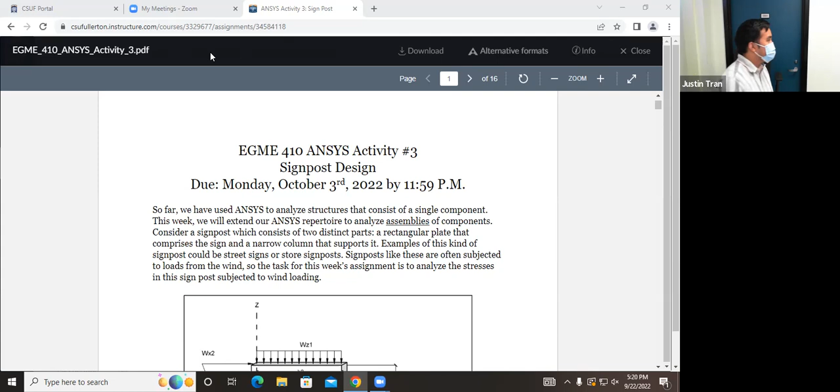All right, so we have an ANSYS activity today. And so if you want to start up Workbench, I'm going to do that right now. Then we can kind of hit the ground running once it begins.

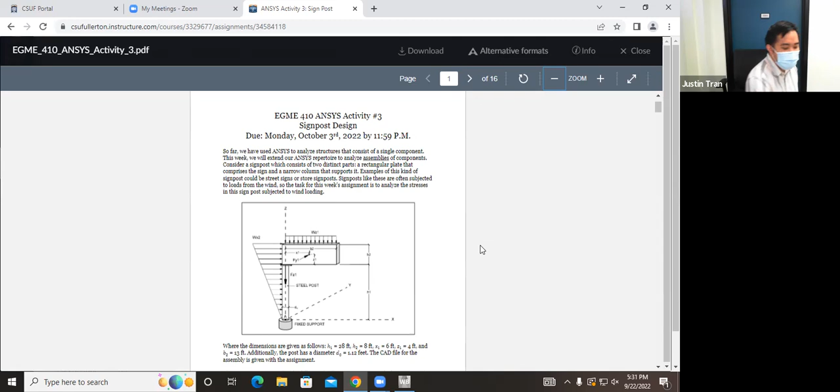And so I think last time we were here for ANSYS, I told you that I would look into seeing if we can update the versions for ANSYS here in the lab to 2022. So literally the day after I said that, we got an email from the dean's office saying that our IT person no longer works here. And so literally the day after I said I would talk to IT, the person that could do it no longer works here.

And so that person just started too? Yes. Wow. So I don't know what happened, but he's not here anymore.

Let's just assume for the foreseeable future that this is how it is. So you're going to have 2021 here in the lab, and on your laptops at home it's going to be 2022. What I saw a lot last time was a lot of you brought your laptops to work on the activity so that you don't have to transfer files. If you have that option, that's great. If not, try to finish as much of the activity here as possible, and then make some time, either tomorrow or sometime after that, to work on it in the lab.

Okay. So with that in mind, I am giving you a bit more time than usual. Normally I give you a week to finish the activities, but this will be due not next Monday, but the Monday after that. So Monday, October 3rd. Just to give you a couple more days if you need to come into the lab to work on the activity. All right, so here's our third activity.

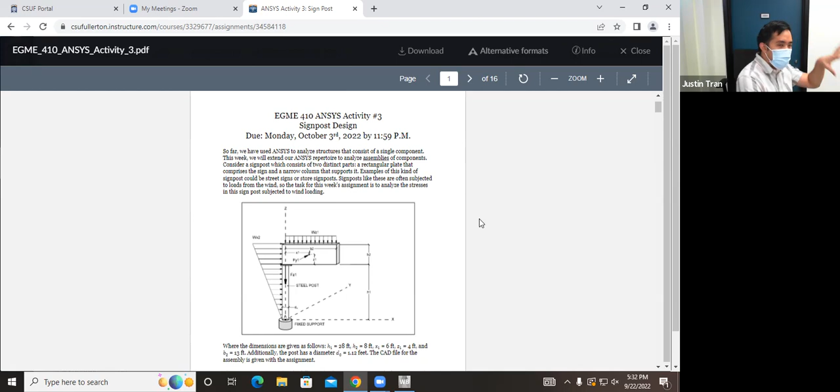We are going to be working on simulating a signpost. Your visual for this is, if you're driving on the freeway, you see those signposts that tell you when your exit is. That's basically what we're designing here. There's quite a few loads on this one, so we have a lot more boundary conditions than normal, and we'll walk our way through that.

What else is new about this one is that we're going to be working with an assembly. Technically activity 2 was an assembly, but we only worked on one part of it. This time we're going to be working with multiple parts, and we're going to see what that entails in ANSYS and what extra work you need to do.

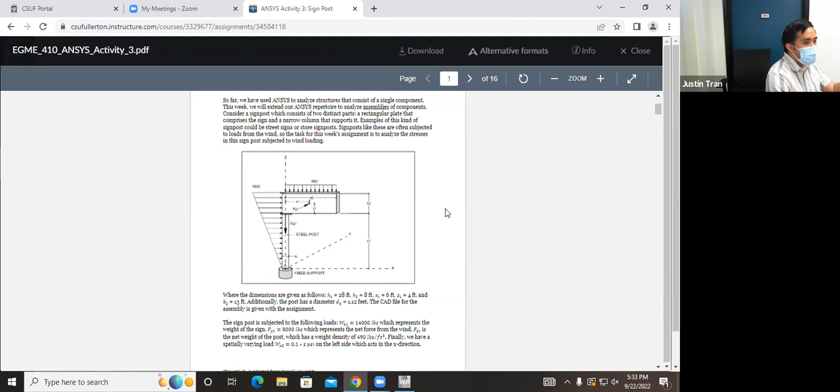Just like the second activity, I'll walk you through the beginning parts and a lot of the new features that we haven't gone over in ANSYS yet. For the rest of the activity, I'll let you work on your own, and I'll walk around and help people as I can. I think that's all the announcements. Are there any questions before we get started? Okay, let's go ahead and get started.

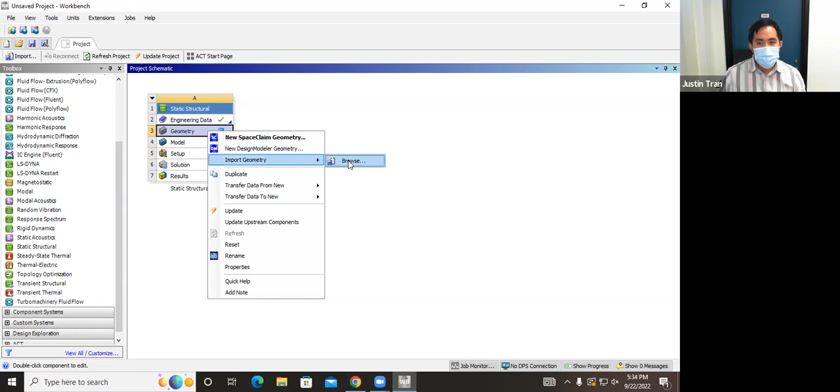Oh, I haven't downloaded this yet, so let me download this. Okay, first thing we're going to do is open up Workbench and start a static structural analysis. Just like before, we take static structural and drag it into the project schematic. Let's import our geometry: right click geometry, go import geometry and browse, then navigate to where you downloaded the CAD file.

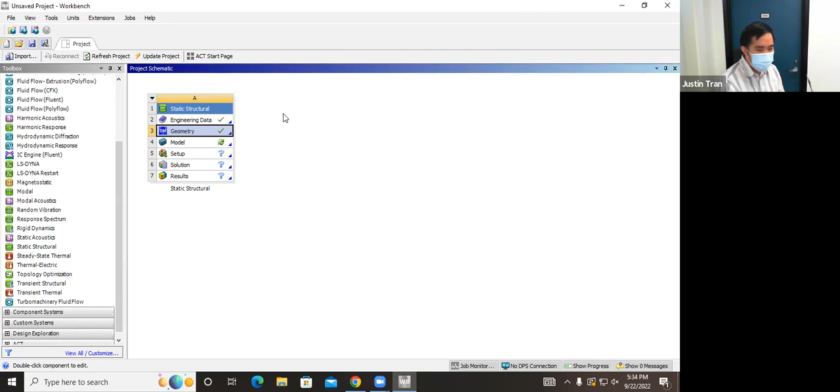The good thing about this project is that this geometry was actually created within Design Modeler, within ANSYS, so there should be no compatibility issues and it should load just fine. Fingers crossed. So I'm not going to check the geometry. What I am going to do is add a new material property. Just like in activity 2, we double click on engineering data, which opens this new tab, and exactly like last time, we're going to add a new material for aluminum.

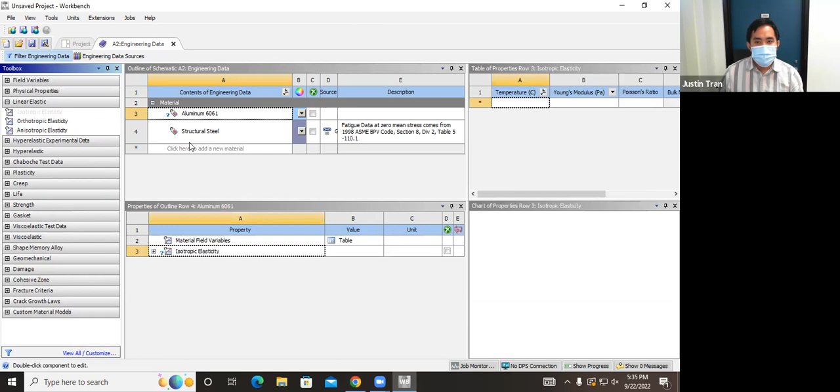6061. Okay. And we're going to add the following material properties. Just like we did last time, we're going to go to linear elasticity. We're going to double click on isotropic elasticity, because remember, we're assuming that this aluminum is an isotropic material. That'll allow us to specify the Young's modulus and the Poisson's ratio, just like last time.

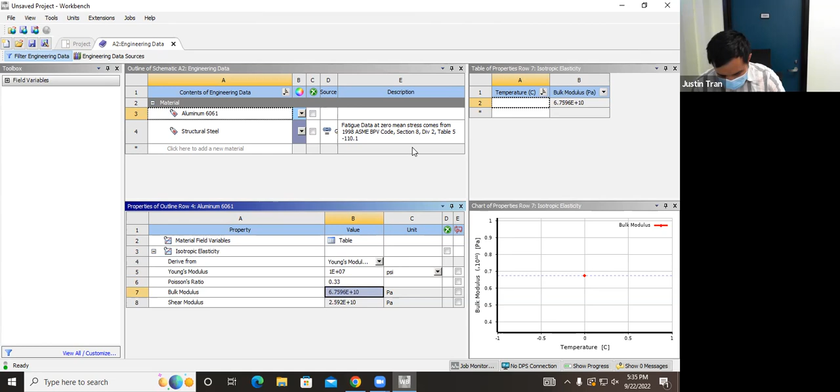Make sure to change your units here. Remember, when we're defining our Young's modulus, we're doing it in terms of PSI. If you do pascals or some other units, you're going to get weird results. So make sure that you're on PSI, and your Young's modulus here is going to be 1E7 and your Poisson's ratio is going to be 0.33. Okay.

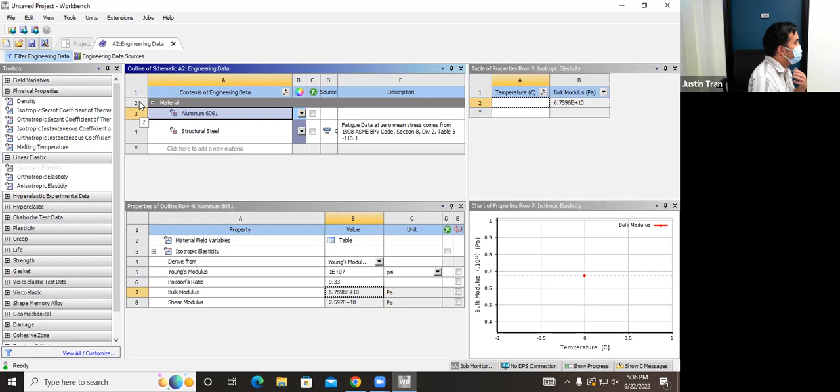All right. There is one more thing that we're going to do here. And I need to find it again. Yes, the density. Thank you. We need to add the density here, because we're going to do a new type of loading in this activity called standard Earth gravity. What that means is that we're going to apply the weight of the object itself as another load. But in order to do that, you need to specify the density.

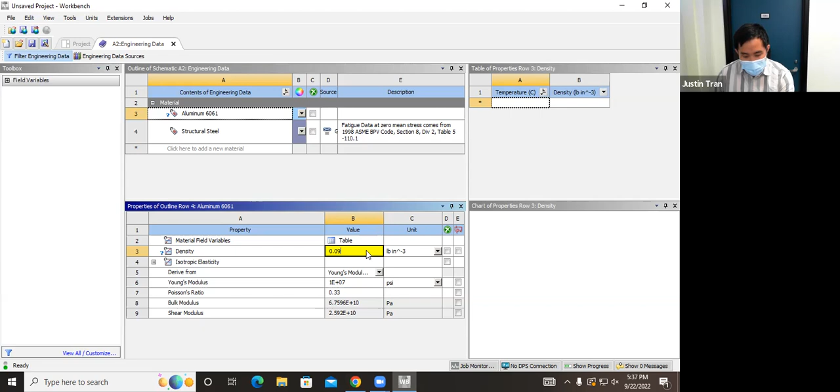Density is under this heading right here called physical properties. Make sure you have aluminum 6061 highlighted. Double click on density, and then we're going to specify the density here. The density that we're going to put in is going to be in the units of pound per inch cubed, so make sure you're on those units there. And the density is going to be 0.0975 pounds per inch cubed. Okay.

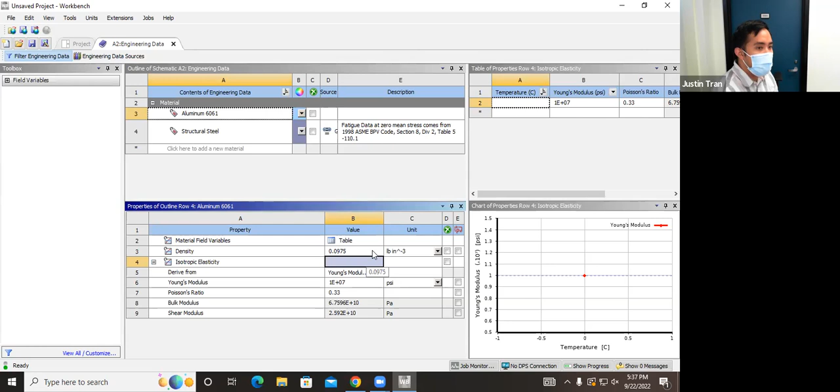Once it's entered, can we change the units back? Oh yeah. This is just for specifying the material property. Once you're in ANSYS, you can change the units to whatever you want. And actually, if you put the density in here and change the units, it'll automatically convert it for you.

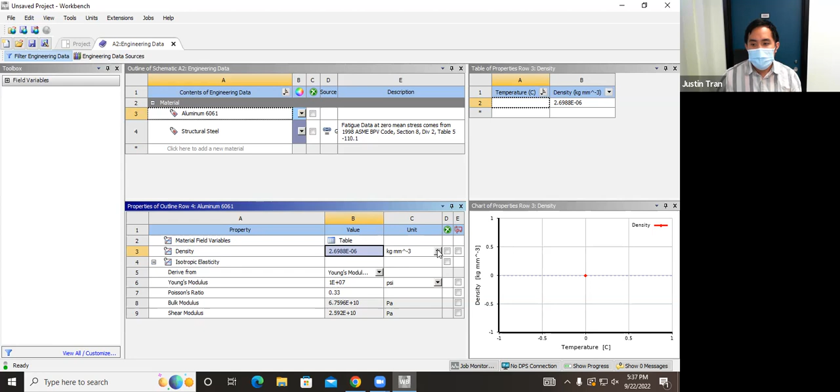If you change to pound per feet cubed, it's 168.48 pound per feet cubed. And if you switch it to kilograms per millimeter cubed, it's 2.6988e-6. But the one that I inputted is pound per inch cubed. So make sure that you're setting the right units, and if you're curious about the conversion, you can switch those.

All right. So that was a little bit fast. Was everyone able to specify all 3 material properties? Young's modulus, Poisson's ratio, density. Everything's okay. All right. If you specified those material properties, let's go ahead and close this out. Then we're going to open up model. Go ahead and double click model, and that's going to open up ANSYS Mechanical.

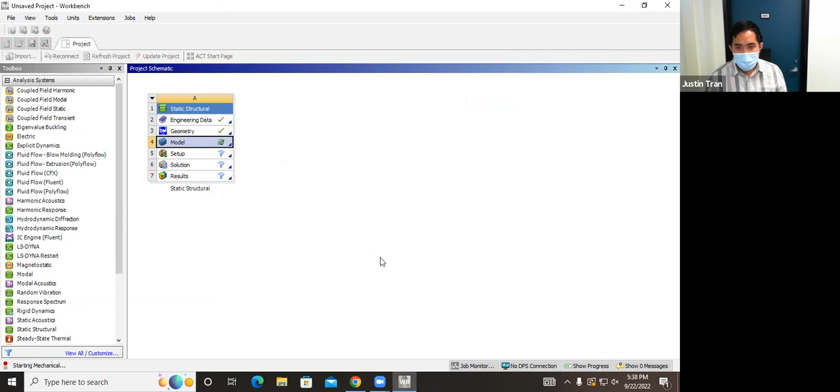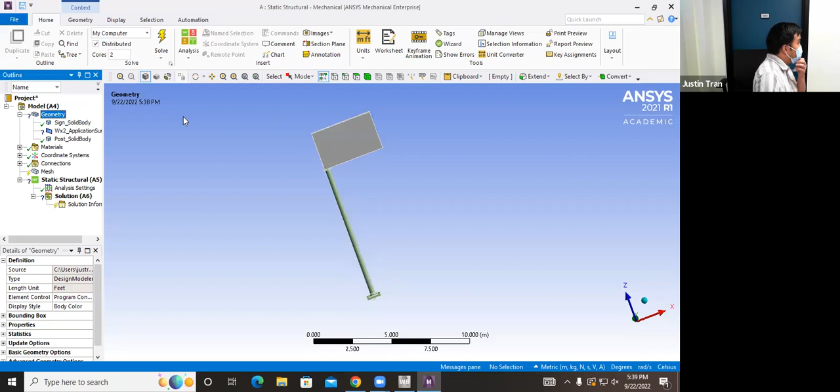All right. For the first time this semester, we're actually going to be working with all parts of this assembly. This assembly consists of 3 different parts. We have the post, which is just the cylindrical post. We have the sign part, which is just the rectangular part above the post.

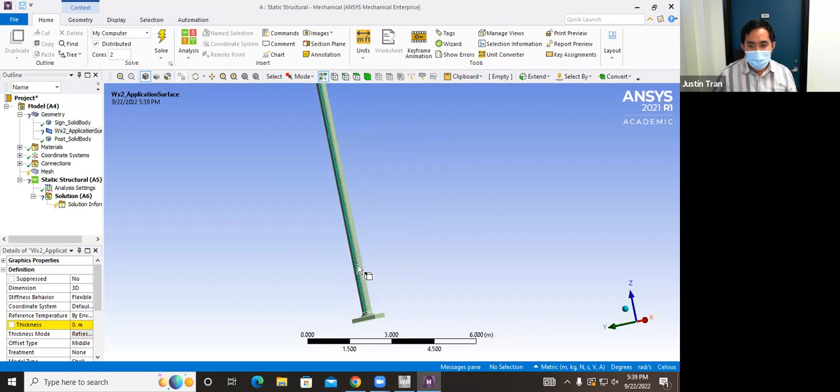What you'll also see is that we have a little bit of a strip here. It's almost like a piece of tape running up and down the length of the signpost. We'll come back to that in a second. But the first thing that we're going to do here is make sure that we specify the correct material properties for each of the parts.

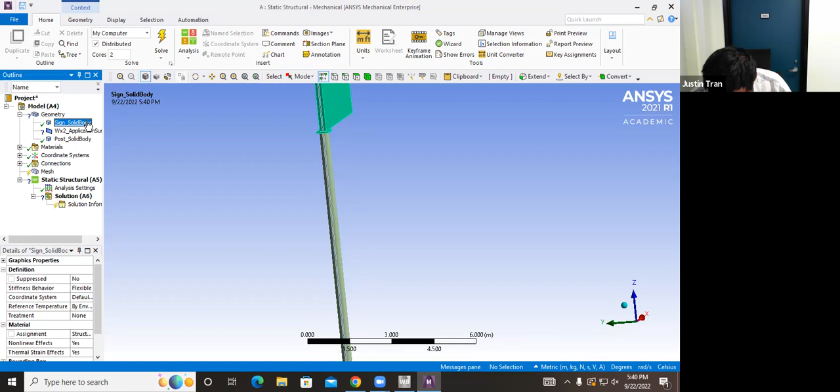All right. First thing we're going to do is specify the material properties for the sign. If you read the PDF, you'll see that the sign is made of aluminum, whereas the post, because it's going to be doing most of the supporting, is made of structural steel. Let's go ahead and click on the sign, and then under material assignment, in the bottom left, you'll see this area right here. With the sign highlighted, you're going to change the material assignment to aluminum 6061. Okay.

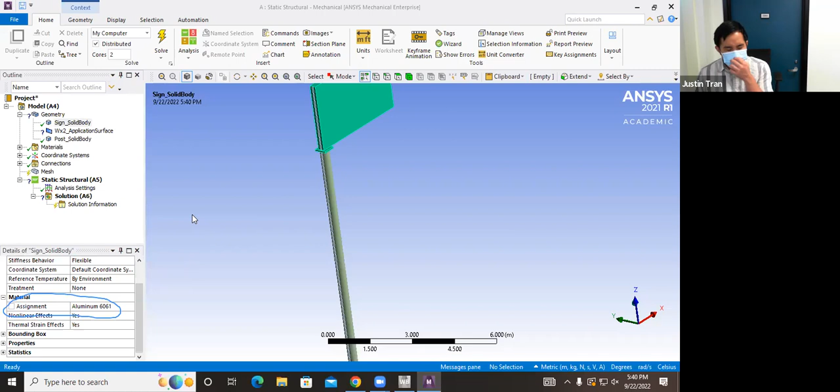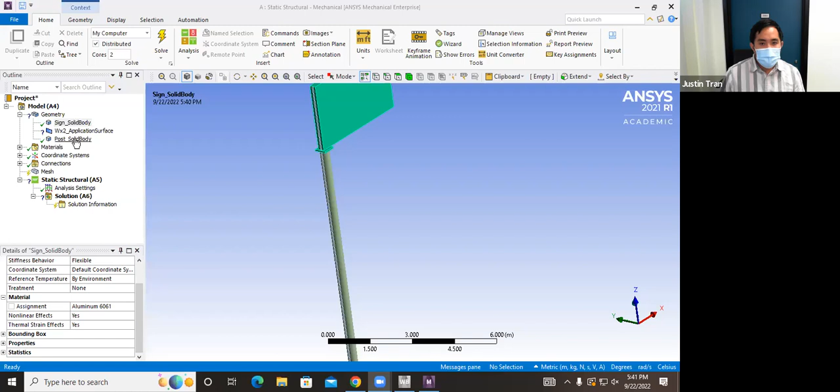And so once you do that, then the sign is going to have all the material properties that we just inputted. So it's going to have the right density, the right Young's modulus, as well as the Poisson's ratio. Okay. So now that we've changed the material properties of the sign, that's good to go. The post is supposed to be made out of structural steel, and so we can leave that alone.

Okay. And so the last thing that we're going to change here is this strip. The purpose of the strip, I like to call these things phantom surfaces. They're not a real surface in this model, so we're not actually modeling a piece of duct tape on this signpost. Well, I wouldn't be surprised if there is some duct tape holding those things together. What this is going to allow us to do is apply a load. So if you go back to the problem PDF for a second, let me go back to that PDF.

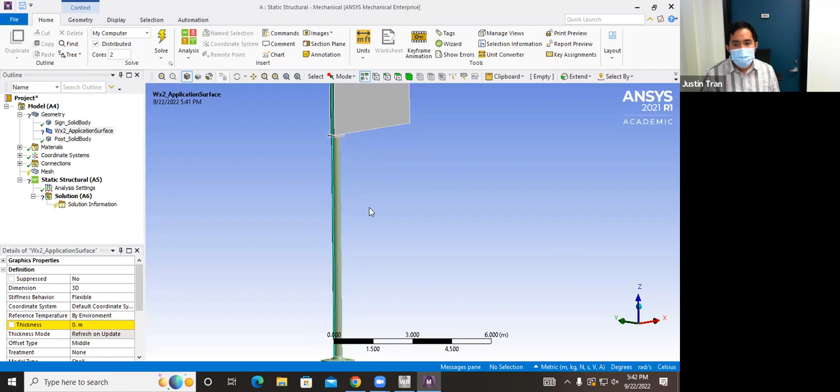If you go back to the PDF, you'll see that there is a force here that is being applied on the vertical surface of the signpost. We call that force WX2. That WX2 is going to represent a wind force, but it needs to be applied only on that left side of the signpost. If we didn't have this strip right here, it would actually be very difficult to assign that force, because if you try to click on anything, you either highlight the entire surface of the post or not. So if we just click on this side of the sign right here, that takes care of that, but then we can't apply the force down here.

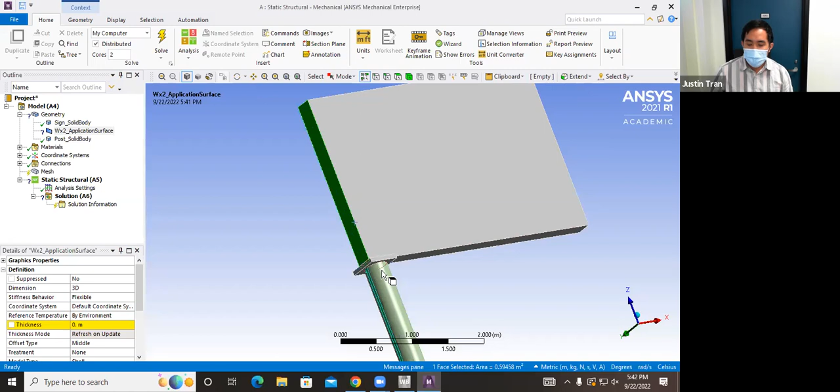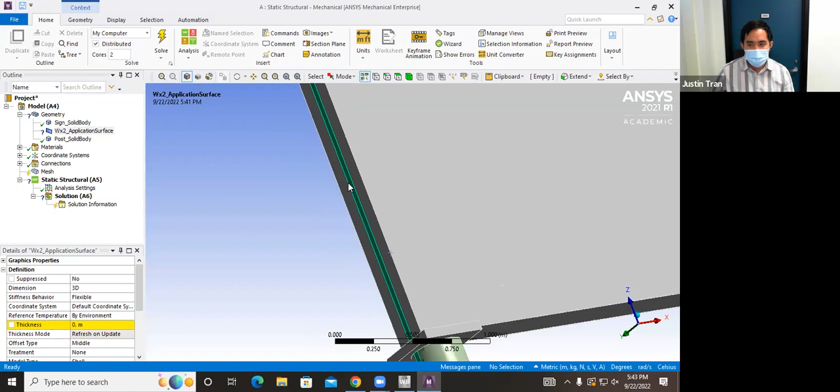And so what we did here with this part was we created a very thin surface that stretches from the very top to the bottom. This strip is not going to add any structural strength; its only purpose is to allow us to apply a force. And so if you click on that strip, there you go. You'll see that it highlights green and it goes all the way up and down.

So this is a very common technique in ANSYS, because a lot of times when you apply a load, there's no convenient surface for you to apply it on in your default geometry. So sometimes you have to make up a surface or project a surface onto another. We'll go over how to do this later on in the semester because it is quite useful, especially for your final projects. But for now, we're just going to use it.

Okay. And so the only thing we have to do, even though it's a made up surface, it still has to technically be part of the model, so we have to specify a thickness. If you click on this WX2 application surface, there is an entry here for the thickness of that surface. I went ahead and changed my units to inches. We're going to specify a very negligible thickness here, 0.001 inches.

Okay. Right. So it's negligibly small, basically 1/1000th of an inch. And remember, the point is not to add any structural strength. It's just to give us somewhere that we can apply a force to. Okay. Any questions on that? I know that part of this activity is a little bit weird. Yeah.

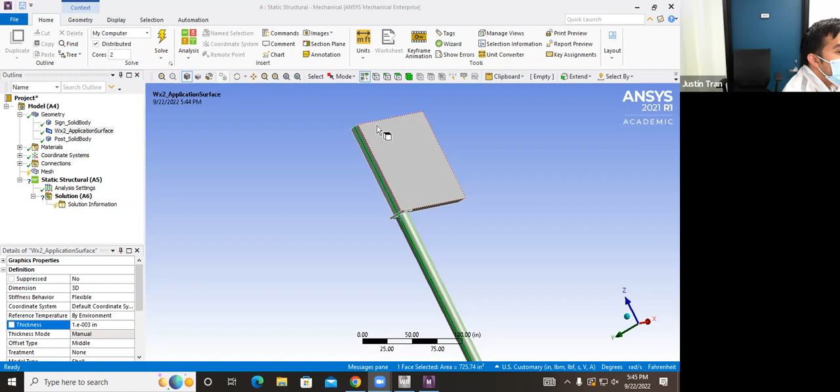Yeah, you can keep it as steel. It's going to be so thin that it doesn't really matter what material we put it on, so we can just leave it as the default. Good question.

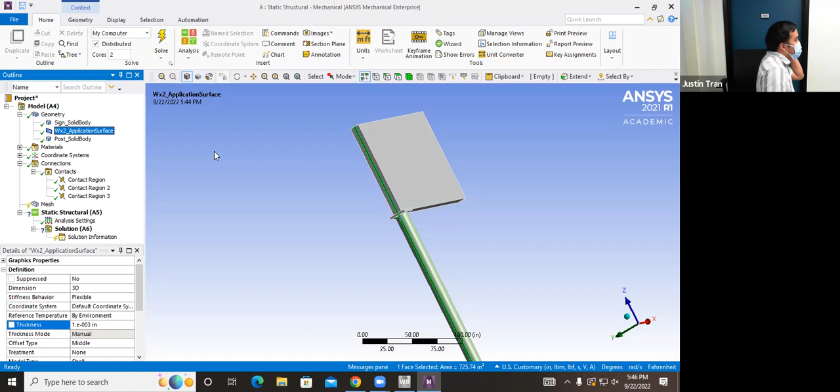Okay, so the next thing we're going to talk about are connections. This is something unique to assemblies. When you have multiple parts interacting with each other in a finite element simulation, you have to define how they're going to interact. That might seem strange because even though it's an assembly of parts, we want it to behave as if it's one part. We're basically going to assume that this sign is bolted and welded onto this post.

There should be no separation, no sliding between the two parts. But there might be some situations where you do want some kind of sliding or maybe some kind of friction. The way you can define that is through this tool here.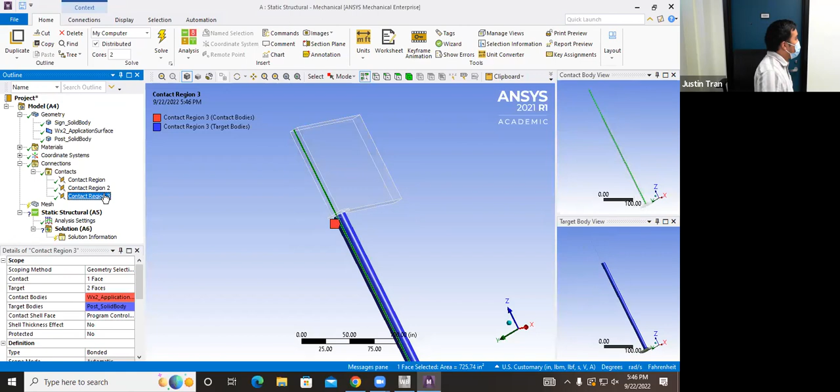If you click on connections and contacts and expand this tree, you'll see that it's created 3 contact regions. Those contact regions are basically defining the interaction between 2 different parts in your model.

For instance, I'm going to click on contact region 2 here, and if you look in the bottom left corner, you'll see the 2 parts of your assembly that are interacting through this contact. For this particular contact, this is defining the interaction between the sign and the post, which is why both parts are listed here. The other contact regions are between the strip and the other parts: this is the strip and the sign, and contact region 3 is the strip and the post.

From here, you can define how these parts are going to interact. Once the simulation begins, you can say it's okay for these parts to slide past each other, maybe with some friction, or maybe you don't allow them to separate. But the default setting for this is bonded.

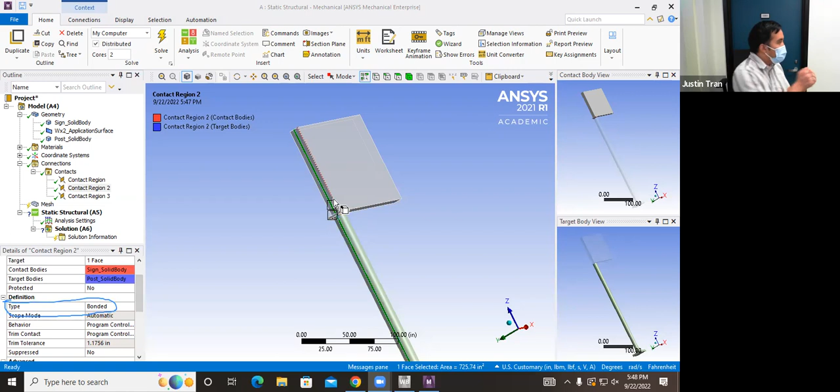If you look at the type here, that defines how those connections are going to behave. Bonded is the default, and what bonded basically says is that these 2 parts are welded or super glued or bolted, however you want to visualize it. There should be no separation and no sliding between these parts. For this particular activity, that's exactly what we want.

We don't want any separation, we don't want any sliding. But for your final projects, especially if you're doing a dynamic simulation, maybe you want some contact, or some sliding, or some friction. So for here, we're not going to do anything, we're just going to leave it as it is, but I want to make you aware of that feature.

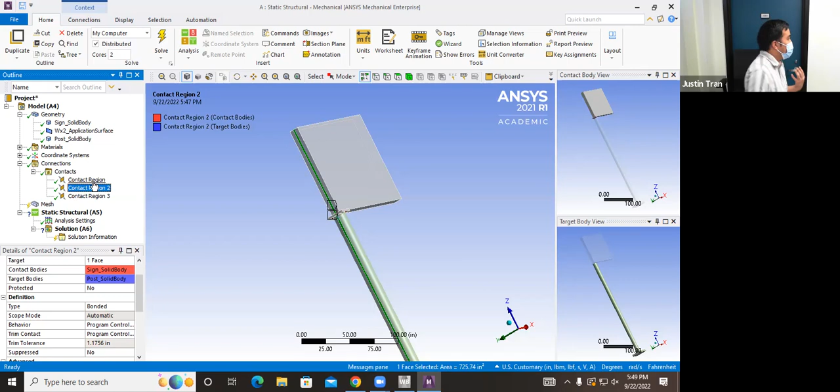One thing that we will do here is rename these. So far it hasn't really been an issue in our first 2 activities because we haven't had that many parts or that many loads. But once you start working with more complex assemblies and lots of loads, it helps a lot to label these quantities, because when you go back and check, it's really helpful to read what this part is defining rather than just 'contact region 2,' which doesn't tell you anything.

To rename something here, you can highlight it, right click, and hit rename. What I like to do for my contacts is rename them based on the parts they're contacting. So here I'll call this the post sign connection - this tells me right away what this connection is for.

The next one is between the strip and the sign, so we'll call this strip sign connection. Then this one right here is between the strip and the post, so we'll call this strip post.

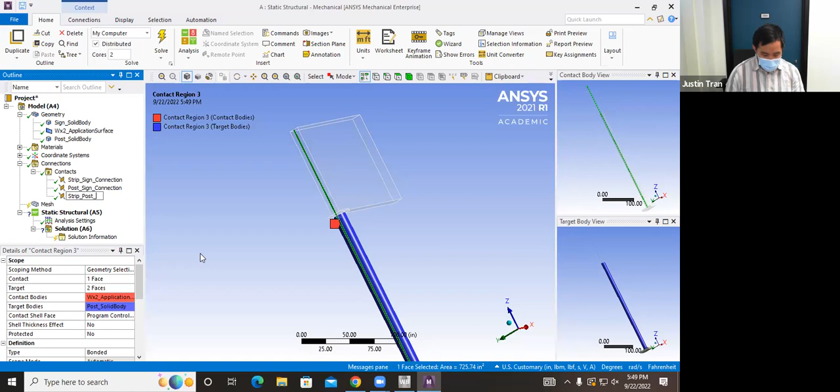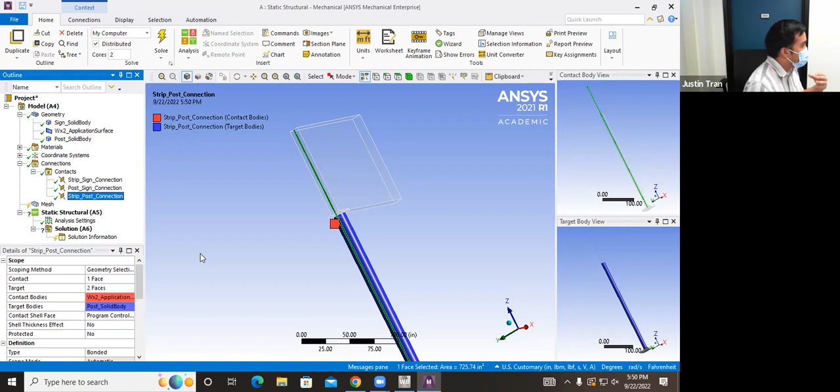All right, so you don't have to do this, and it's mostly optional, but I'll tell you that once you start getting into more complex projects, renaming your stuff is really important. Otherwise, you're going to get lost in your own work. You'll be applying 7 different loads, and by the 7th one you'll wonder if you already applied one, and you won't know because you didn't rename your stuff. So it really helps staying organized, and staying organized is important for these kinds of projects.

All right, and so that's it for the strictly new stuff that we haven't seen before. And so the next step, of course, is the meshing. I'll kind of let you guys do that on your own, though.

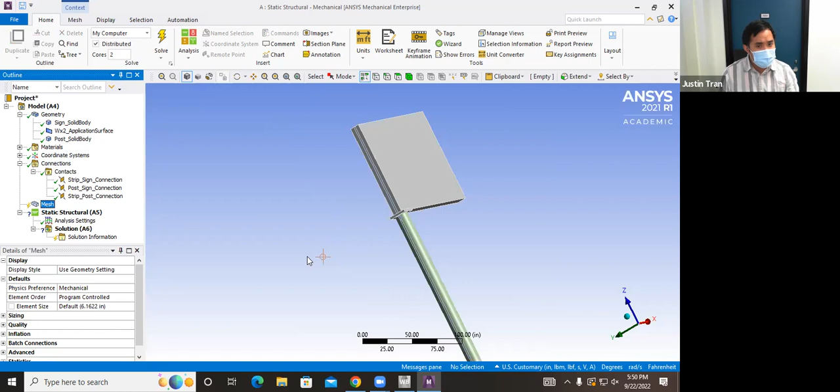The only thing I will require in this one is that you mesh the sign and the post separately, and that you apply different meshing settings for each. So you should have a method object for the sign, where you can choose the element shape and element order. I want you to make a sizing object for the sign, so you can specify how big you want the elements there. And then you're going to have the same thing for the post as well - method for the post, sizing for the post.

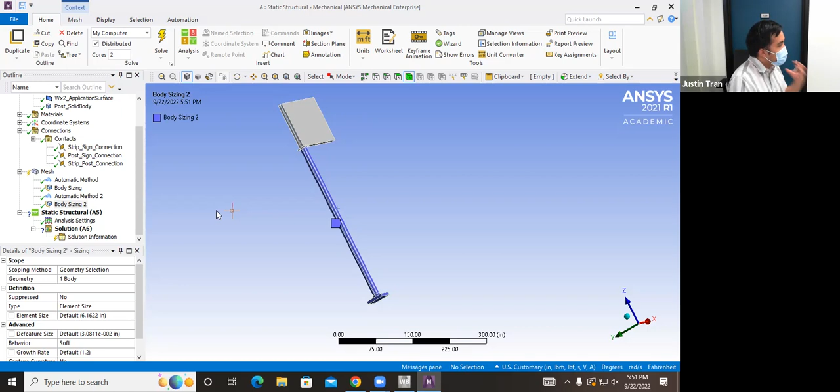I'll let you decide how you want to size those things, but remember what we talked about in terms of mesh - what types of elements work well for certain geometries, and where you want to focus the element density. Think about where you expect the stresses and deformations to be, mostly the stresses, and that's where you want to concentrate most of your elements. But I'll let you guys kind of decide that on your own.

But what I did want to go over together was the loads, because these are a bit different than what we've been used to.

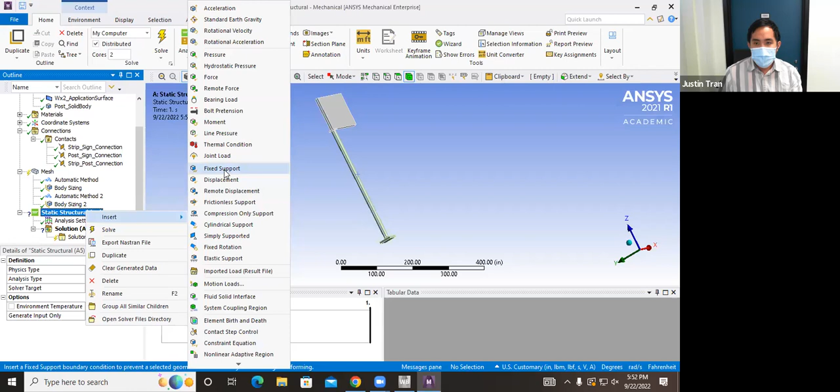So first thing we're going to do for the loads and constraints is we're going to fix it. Just like we've done before, we're going to add a fixed support. For this case, it's fairly obvious where we're going to fix it, because this post is going to attach into the ground, so we should fix it on the bottom surface. Make sure you apply a fixed support.

All right, next thing we're going to add here is the weights. This is a fairly big object, so the sign is going to have significant weight, and the post is going to have significant weight as well, and that's going to significantly alter our results. Luckily, there's a very easy way to add weight into a simulation.

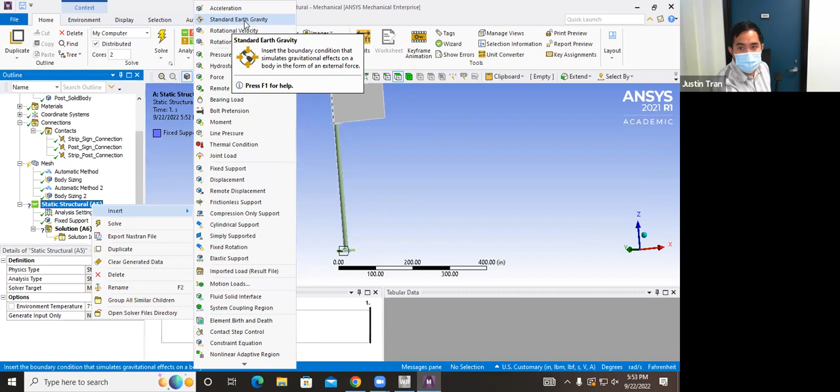We're going to right-click Static Structural A5, go to Insert, and click on the load. Where is it? Right here. If you look near the top of the list, there is a special load called Standard Earth Gravity. If you read the description, it'll tell you that it inserts a boundary condition that simulates the gravitational effects on a body in the form of an external force.

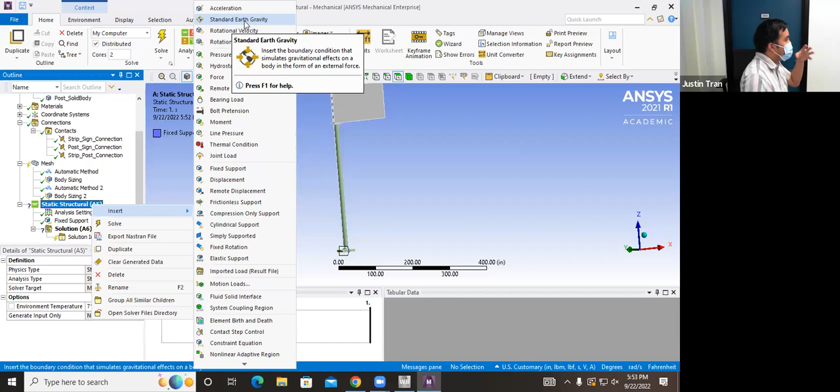What this is going to do is calculate the weight of each part of your model based on the density you gave it, and the gravity constant, and then apply that force throughout the entire model. The nice thing about standard Earth gravity is that you don't have to apply anything - you just have to put it there. If you want to verify, this is giving you the acceleration due to gravity in meters per second, and you can see it's minus 9.8066.

What if we were to do that and it gives the direction of gravity - like right there, it's perfect, but what if it auto did it to the left? How would we change that? Yeah, so you can change it from here. Of course, this means you would have to align the gravity to one of the coordinate axes directions - it can't be a diagonal direction, but you can change which direction. Good question. But for now, the minus Z direction is what we want, so we'll leave it as that.

And so in addition to this, that takes care of the weights of the parts. Are there any questions on this so far? Everyone able to add standard Earth gravity and fixed support? Yeah.

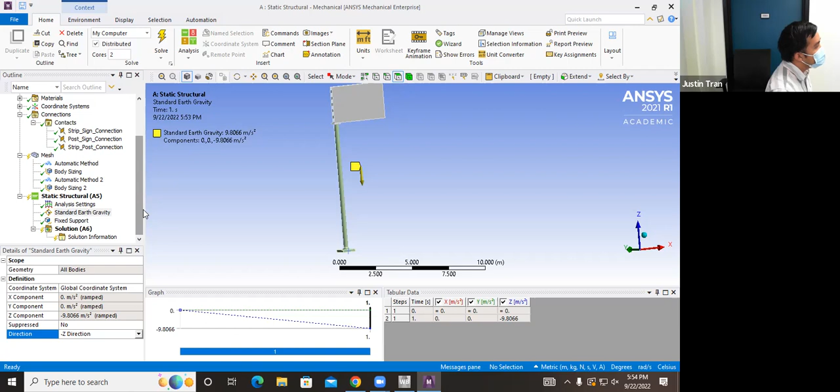Yeah, so you might have to change your units. If you change the units to SI units like the metric, it'll be minus 9.8.

Okay, so there's two more forces that I want you guys to add, and both of those are going to be from the wind. One force is going to be directed at the middle of the signpost, and we're going to add this as a force load.

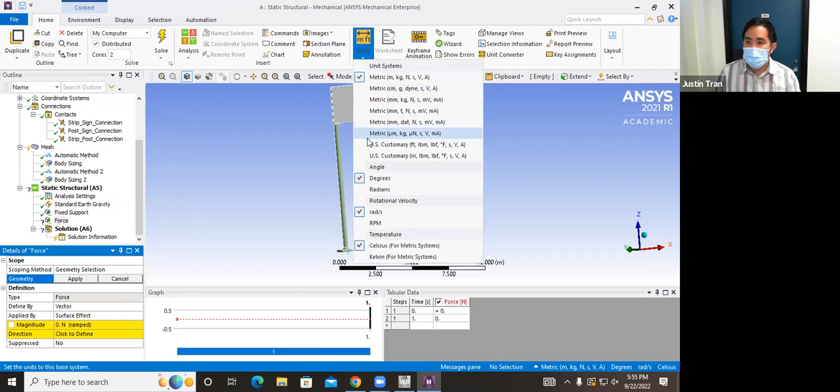I think the magnitude of this force is going to be 8,000 pounds, so we're going to switch the units here to pound force. But the application of this force is going to be interesting.

We talked about this a bit on Tuesday in terms of how you want to apply the boundary conditions. Normally, you don't want to do this because you don't want to apply force at a point. I'm just doing this for educational purposes.

To find the point, switch the selection mode, and if you look at this part of the ANSYS interface, you can change which kind of selection style you want. In this particular case, we're going to look for a point, so you're going to click on this left one right here, or you can do Control P.

If you mouse over the middle of the signpost, you'll see there's a dot, and you're going to click on that dot. Then you're going to apply the geometry there on that vertex, so you should apply that force on that small point, just like that.

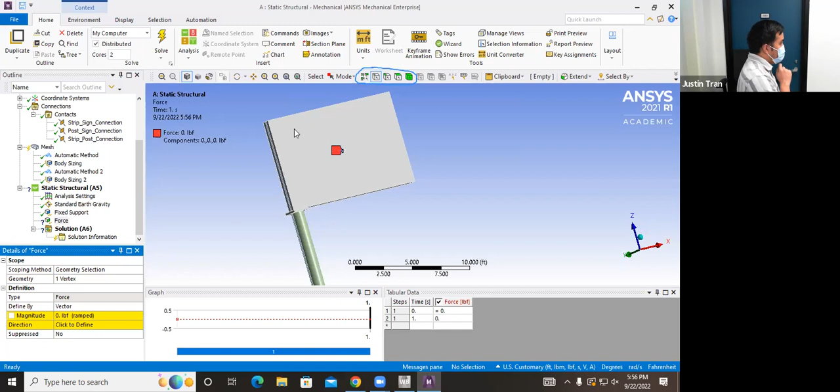From here you can apply the force magnitude, and like I normally do, I like to apply it in components. The magnitude of that force is going to be 8,000 pounds going in the positive y direction.

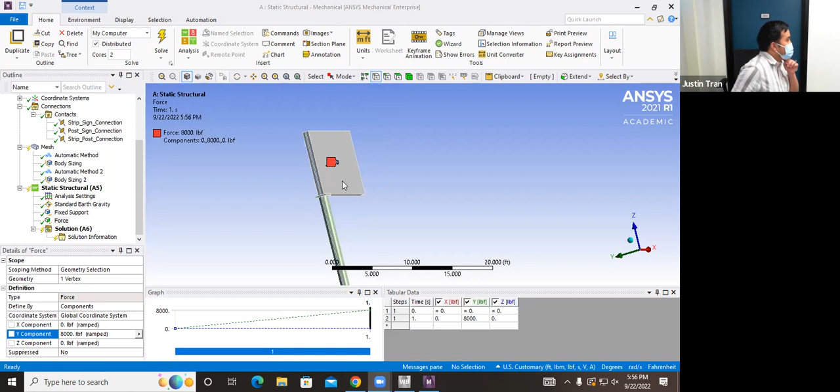So that force is being applied at a point, and there's not much to that force. You just have to find the point, so make sure you're on point selection mode or vertex selection mode to find that point.

This is a good place to show that when you apply loads on ANSYS, it doesn't have to be a constant value. You can actually have a varying load that varies from one point to another. You just have to enter it as a function.

Okay, so let's come back to ANSYS mechanical, and let's right click on static structural, and the type of load that we're going to apply is a pressure.

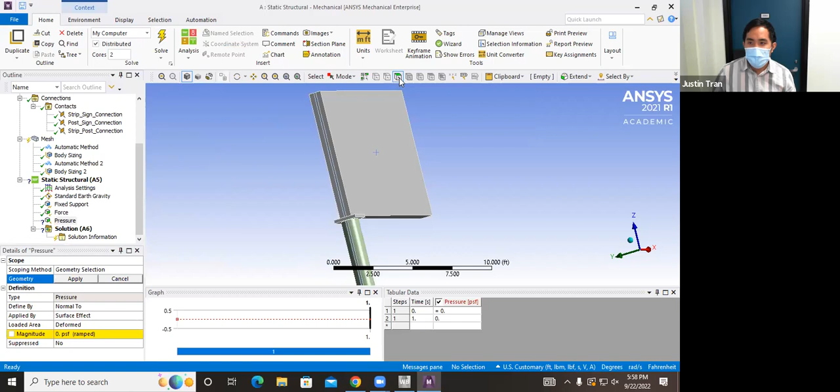Let's go ahead and click pressure. For the application surface, you're going to select that thin strip, so make sure you're on face selection mode. Actually, it kind of forces you to, and you're going to try your best. Zoom in if you have to. Let me close these things so you can see better.

And you're going to click on the strip. Make sure you're only clicking on the strip, so nothing else is being highlighted. And then once you've selected the strip, go ahead and apply it to the geometry there.

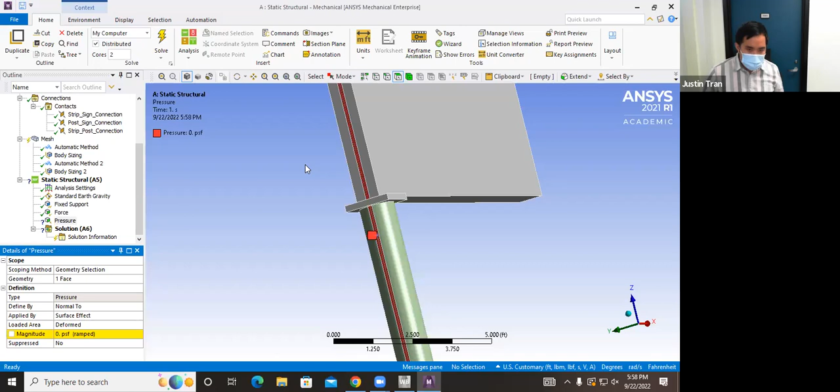Now we're going to enter the magnitude of that pressure. But before we do this, because we're going to be inputting a function, you want to make sure the units are correct. Before you input the function, make sure your units are in US customary with inches. There are two US customaries, and you want to make sure you're on the second one with inches, otherwise you're going to get a wrong force. So double check that your units are in inches.

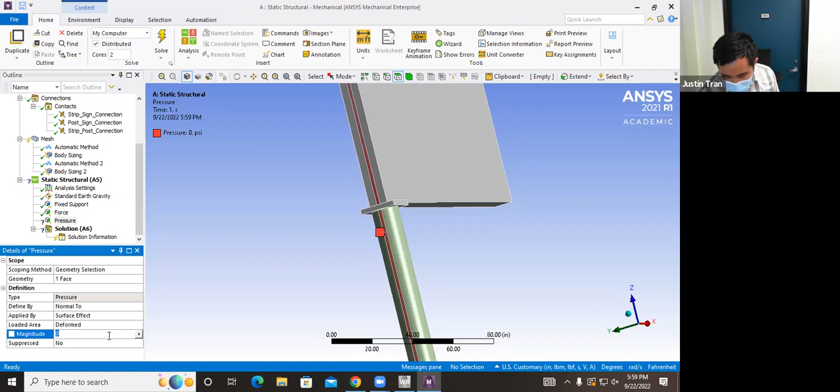Now we're going to apply the magnitude of the force here. The function that you're going to specify is going to be a function of z, because the force is going to change in the z direction. And so to input a varying force, I'm here in the bottom left.

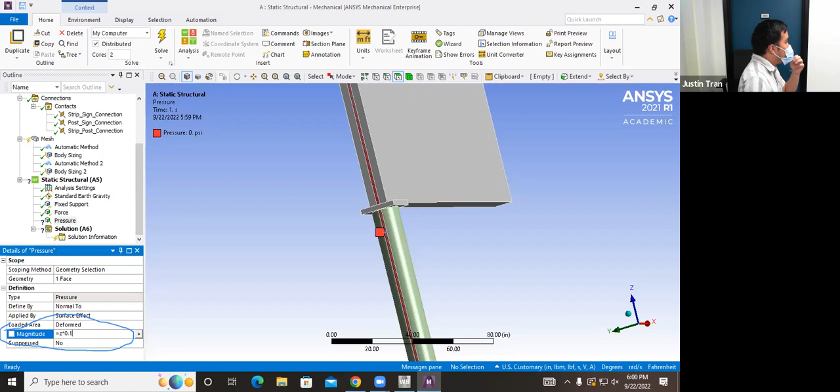To tell ANSYS that you're going to input a function, you're going to put an equal sign. And so just like Excel, when you're inputting a function there, you put an equal sign, and then you're going to put the value of the function. And so for us, it's going to be z for the z coordinate multiplied by 0.1. Okay. And so what this says is that it's going to tell ANSYS to take the z coordinate of wherever you are on the signpost and then apply a pressure force that's 0.1 multiplied by that z coordinate. Okay.

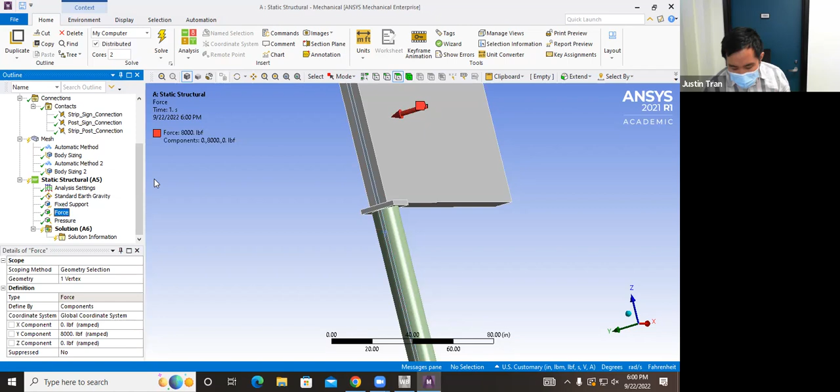Okay. And so that should be good right there. All right. Yeah, it's a little bit hard to see, but it's 0.1 times z, or z times 0.1. Okay. And so last thing I'm going to do here, just like I did with the connections, I'm going to go ahead and rename this. And so this force right here will be the point wind force, because it's the wind force that's at a point. And this pressure force right here, this will be the varying wind pressure. Okay. In case you have to go back and modify these things.

Okay. And so let me go ahead and highlight this one more time, just for people to see what the function is. All right. And so from there, you guys can take it from here. Go back to the meshing, make sure you apply the mesh sizings, and play around with that. And then with these boundary conditions, the way that they are, you should be able to start running some simulations. Okay. And so I'm gonna start making my rounds. If you need some help, go ahead and raise your hand and I'll come around and talk to you guys. Okay? But the rest of the activity is in your hands now.

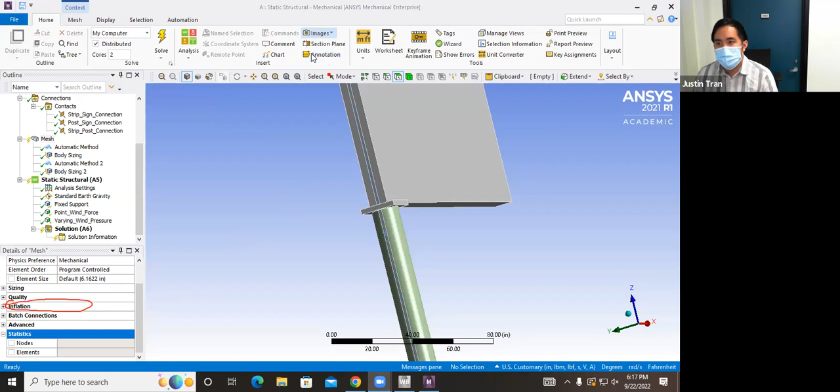But I was telling people that you want to be a little bit strategic about how you allocate your elements, because you have a total number of elements that you can have. I think it's around 51,000 or something like that. That's the maximum total. For this activity, there's two parts: the sign and the post. So you want to really think about where you want most of your elements to be.

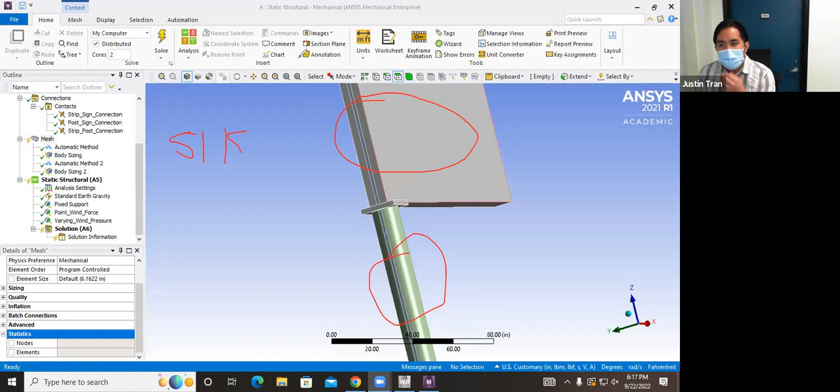Okay, so you're kind of right at the limit. I think you can push past 51K, it might be the old limit, but you want to be strategic. Think about where the stresses are going to concentrate in this model, in the post or in the sign? Based on where you see the higher stresses, that's where you want more elements. For the areas that don't have a lot of stress, you can portion up the elements in those regions. So be a little bit strategic about it. Smaller makes it longer.

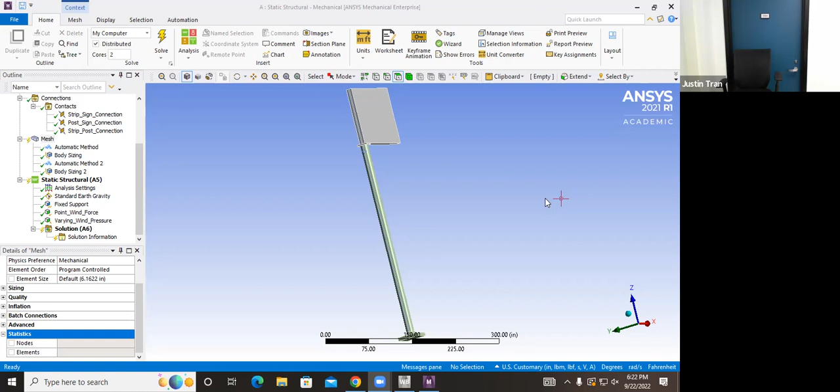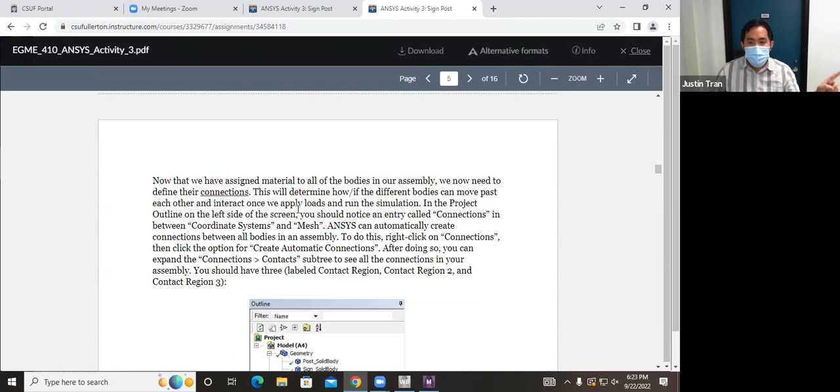All right, guys. So it's 6:20, and it seems like you guys are making good progress. But I do want to give you guys a couple tips. I've gotten a lot of questions on the meshing. Specifically, for the last two activities, I asked you to explain your thought process. Up to this point, we've had lectures on meshing, boundary conditions, and material properties, and I want you guys to incorporate some of that information here.

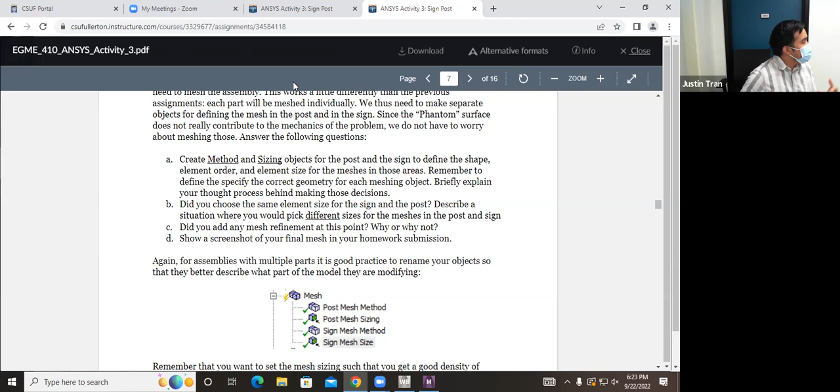For this activity, I'll be honest with you, I grade these for completeness. I'm not reading these super carefully, but it's good to start thinking about this because next week we're going to start working on the midterm project, and you're going to need a good grasp of that theoretical information. So start thinking about this now so that on the project you can explain those things. Your projects I am going to read very carefully and grade a lot more harshly than your activities, okay?

For instance, in our meshing lectures, we talked a lot about the relationship between element size and accuracy. The smaller your elements, the higher the accuracy. It would be great if we could use really small elements everywhere and maximize accuracy, but in reality we don't have the time, because with 1 million elements you'd be waiting a really long time for your results. And a lot of times you don't have that time.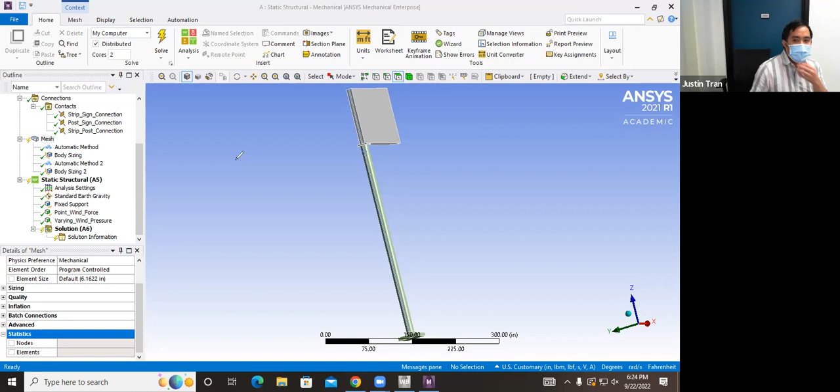The reason this is an assembly where you can assign a different mesh sizing to the sign versus the post is that it allows you to strategically allocate where you want most of your elements to be. Specifically, look at the stress field. If you've already run the simulation, you've probably seen that one part, either the sign or the post, I won't spoil it, has a lot more stress than the other. For that area, you'll want to concentrate more elements to estimate the stress more accurately.

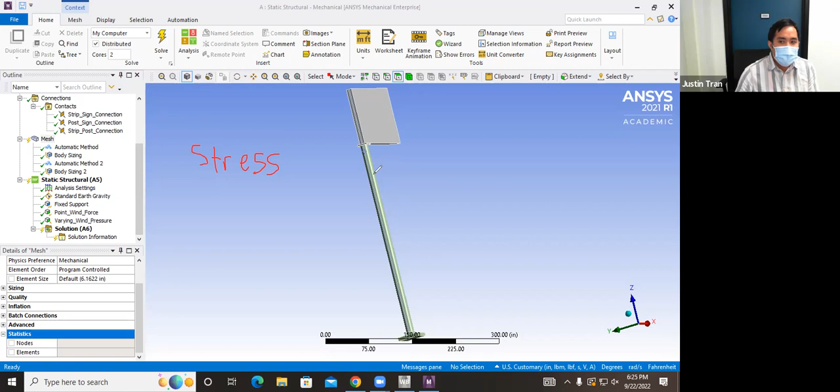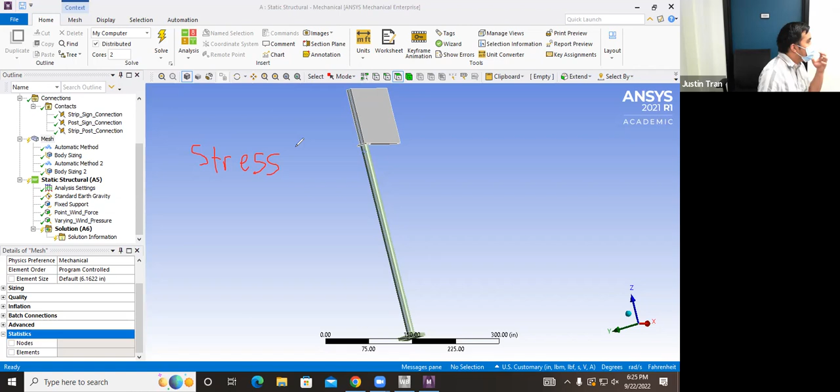Another example is the shapes. These two geometries are very different: one is a literal rectangle and the other is a cylinder. Between triangular and rectangular elements, one is better at a certain type of geometry than the other. That's the reasoning I want you to think about when choosing the size and the shapes. Think about the features of the geometry, what you're trying to get from the simulation, and what's most appropriate for that. Okay, so there's that part.

A lot of this activity is fairly straightforward, so I want to talk about problems 5 and 6. Problem 5 is post design. After you run your results with your mesh, I want you to change the geometry of the post so the results have less stress. To do this, open the part in Design Modeler: in Workbench, go to Geometry, right click, and click Edit Geometry in Design Modeler.

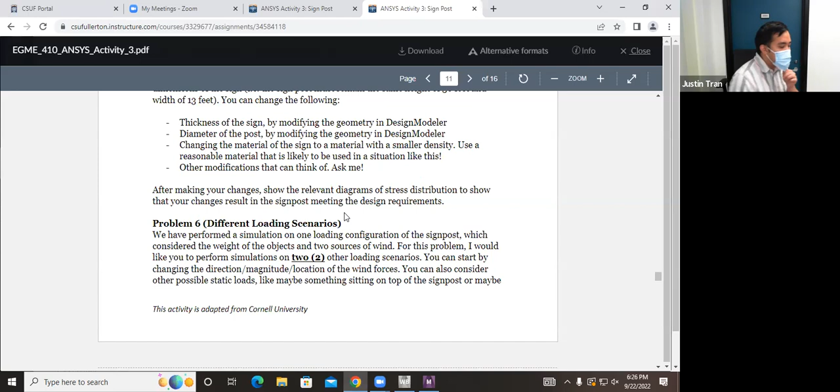I want you guys to think of different loading scenarios. I gave you some loading here where we're basically simulating the weight of the signpost, as well as a couple of wind forces. So I want you guys to think of, what are some other typical forces that could be applied on a freeway signpost and then apply them into the model, okay?

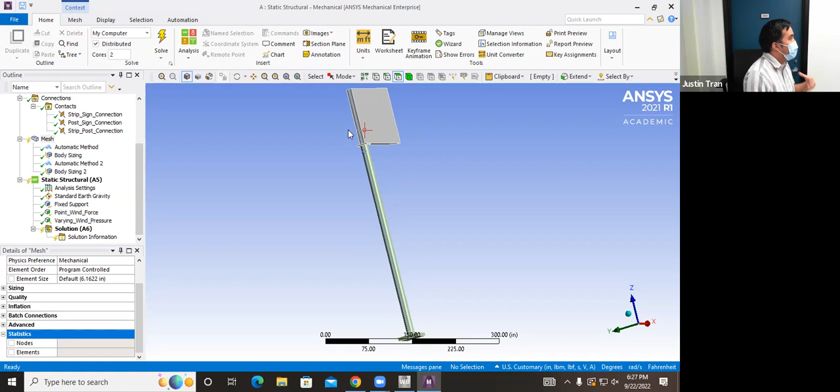This goes back to our lectures on boundary conditions and thinking about, what's the physical situation that the signpost is going to be in and how can you model that with boundary conditions, okay? So I'll give you an example. Because I'm saying this, you can't use this one, but imagine that you had a really fat pigeon that's sitting on the top of the signpost, okay? You can model that fat pigeon, let's say that it's just sitting on the very edge, okay?

Okay, imagine it's a school of pigeons, a lot of pigeons sitting in a row. What we can do then is apply a force here on that edge, a force that's vertically downwards to simulate all those fat pigeons sitting on that signpost. So that's an example of a different load that you can add. I want you to think of 2 alternate scenarios, 2 different types of loading conditions, and then run the simulation for that and see how that affects your results.

Okay. So I have two questions actually. So we're gonna do one at a time, so we're not adding our two at the same time? Correct. Are we also adding these on top of all the stresses we added already, or are we getting rid of the others and then just doing one? You can't get rid of them all. Actually the only ones that I think have to be there are the fixed support and the weight. But you can get rid of the wind forces and add just the pigeon forces.

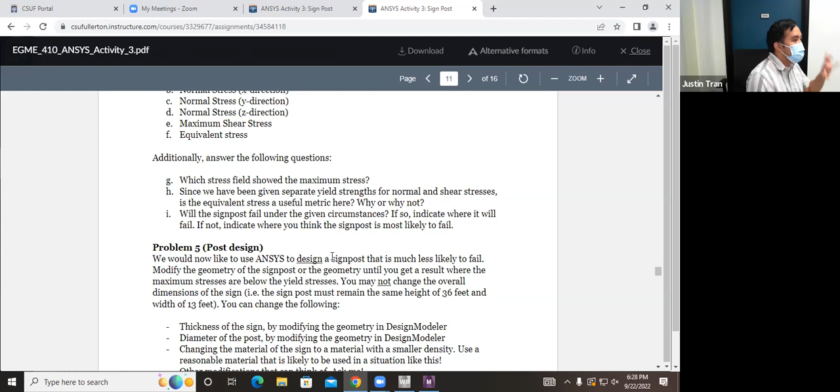Yeah, that's a good question. When I say two different loading scenarios, I mean one at a time. So don't just add two loads and do it once. Add a load and then run the simulation, and then maybe take that one away and add a different load and run a different simulation. So when I say two different loading scenarios, I mean two different simulations that you have to run, different from the original. All right, any other questions on this?

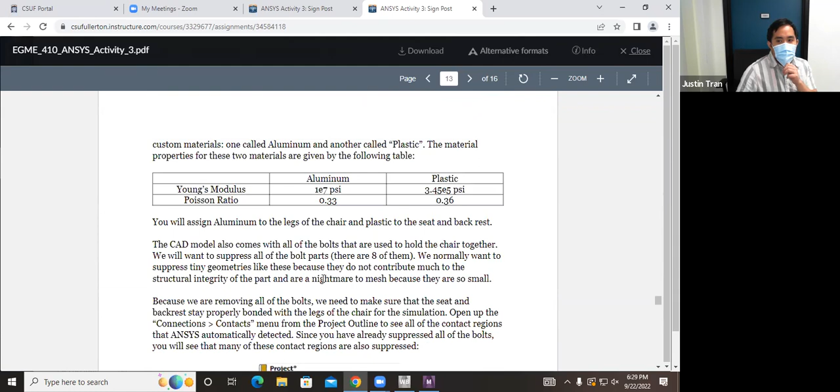There is one last part to this activity, which is I want you guys to run a finite element analysis on a chair, which people have said is the worst designed chair they've ever seen, so you can make fun of it if you want. Just like the last activity, this is just an additional one. You don't have to do a lot here. Just make sure that you run some simulations on this chair and follow the directions there as well.

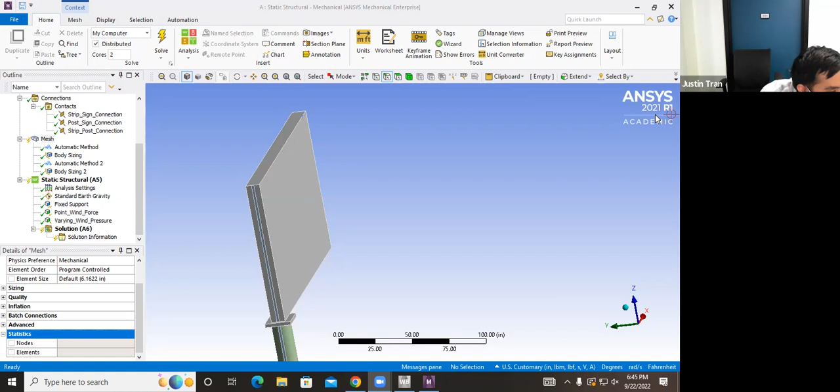And also, because of this new feature, I'm getting like an info. It's not an error, but it's warning me that it may not calculate. So connections. I know yours doesn't say it, but mine. So like this one. Change anything? No, I just changed the name. That's it. I didn't touch anything. I just left it as it is. It just says info. It's not real.

Okay. But that one, I don't know what they should do. Oh. That doesn't do it. Okay. It should be okay. Yeah, and this morning... No, yeah, I actually read that, and the reason for it, I looked online, they just say a lot of people were complaining that this isn't a true hexahedron. So they added that feature to warn you it's not a true hexahedron. Oh, okay. Well, a true hex mesh is really hard to do unless you have a literal rectangle. But I guess people want to see those things.

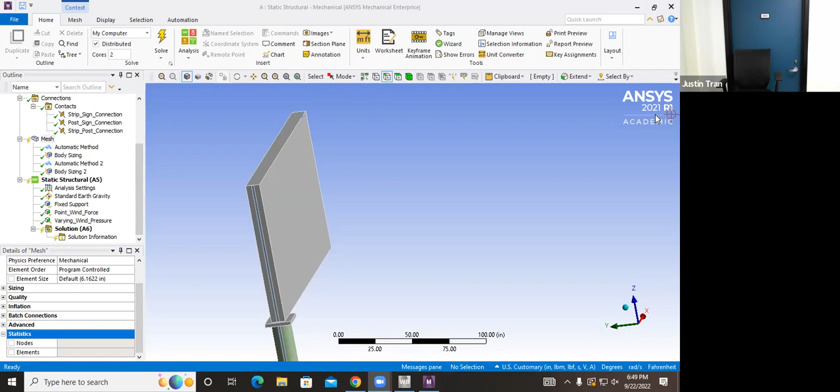Charles, you have an advising meeting tomorrow, right? Yeah, I'll see you tomorrow. Okay, I'll see you tomorrow.